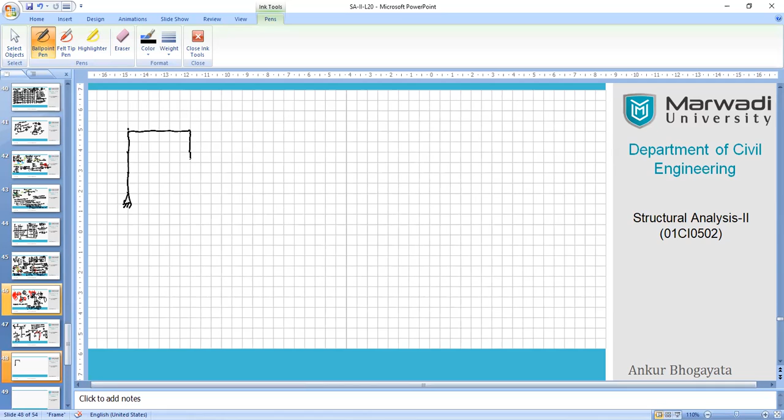Let me give you the question first. So we have a frame like this: 1, 2, and 3, that is the height. We have a hinge support here, right? And we have 3 meters height of this column. I'm trying to develop structural symmetry also. So this is 1 meter. At a distance of 1 meter we have a point load, and we have a UDL on this member having an intensity of, let us say, 1 kilonewton per meter, and we have a point load of 6 kilonewton here.

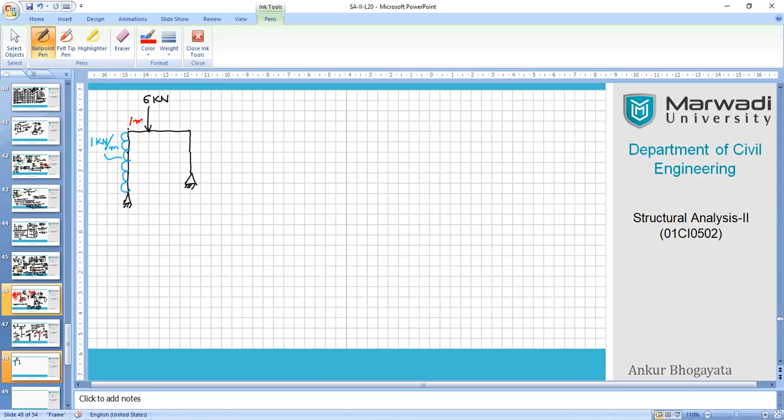Then we have 1 meter distance and 2 meters distance. The total height is 2 meters again. If I wished, I could have changed this data, like 6 to 5 or 10. But I want to give you this data because later you can compare and confirm your understanding with the solution from your book. Don't open the books right now, otherwise you will lose the charm of doing this. So let's do it without referring to the books.

A, B, this is point B. Let's say C and D. There is one more informal point that we can locate here, E. So friends, we want to draw the SFD and BMD for the structure using Castigliano's second energy principle. You know the steps; if you want to rebrush, here they are. First, draw the free body diagram. Second, identify the redundant forces by calculating the external SI. Once you locate the redundant quantity, considering that, find the reactions. Here you can see that earlier we selected the horizontal reaction as the redundant, R.

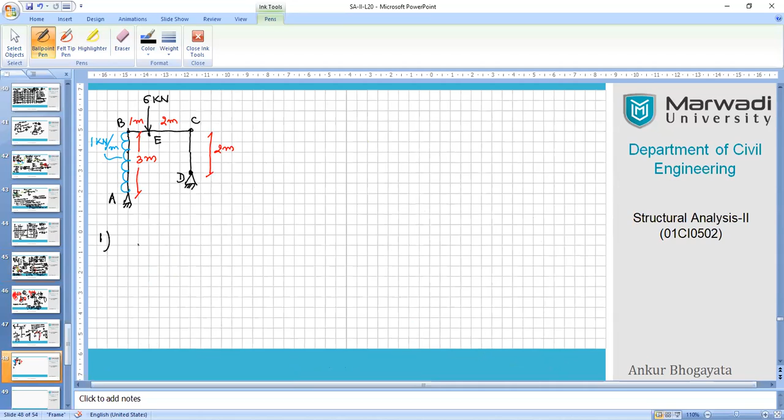So friends, in this case, let me discuss the solution first, right? Drawing a free body diagram is not a challenge. So first of all, let us draw it. Along with me, everyone will draw it in their notes, right? Without any doubt, everyone has to do this. Assume that this is a straight line. You have to remove the nature of the support and we will draw the

reactions over here. Vertical, that is here. And we will assume that the horizontal reaction is also positive because we are not sure, but we can at least name it. Let's name it as H. This is at A. So we will give a value to this horizontal component, that's H, right? So HA is actually H. Then here we have another member with us.

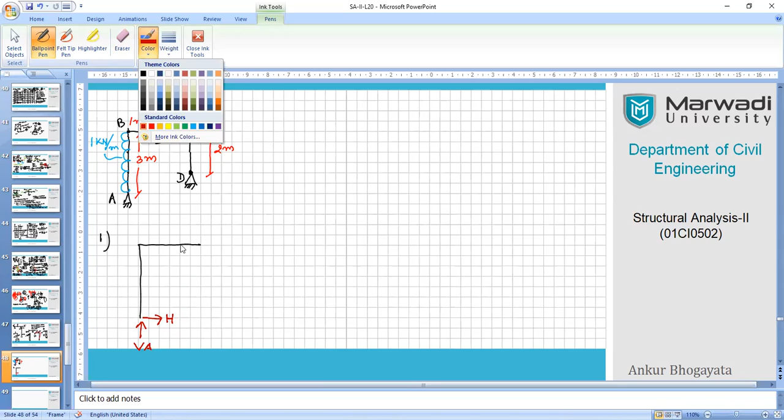Please pay attention and focus on how we solve the problem completely so that you don't miss out any of the things. Let me draw it straight. Let me try it. Otherwise, we'll carry on. Okay, all right. Manageable, right? So here you have the vertical reaction VD. And again, let us assume that we have reaction HD.

We are sure about this value that we have assumed as HA equals H, because we need to take the partial derivative of all the components with respect to H, because we are going to select H as our redundant additional condition. So first of all, let me give you the basic concept. Let me draw this point load and UDL on the system, right?

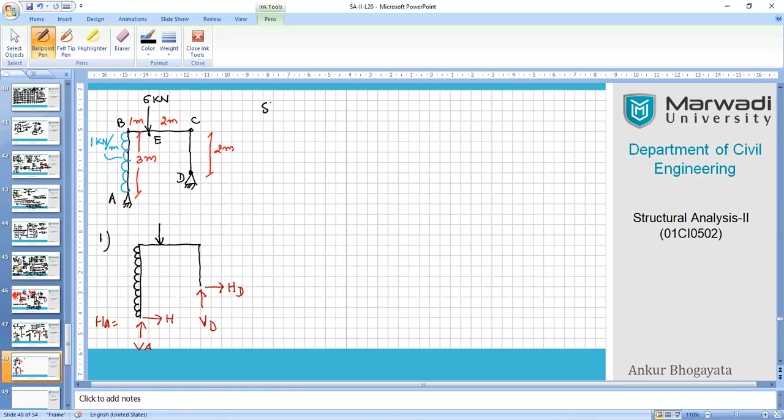So we have drawn the free body diagram, and now you can calculate the SI of the system, right? So how many total reactions are there? There are 4, and the conditions of equilibrium available are 3. So you have 1. So this is the statical indeterminacy of this structure. And if you remove any one reaction or one quantity, your structure will become determinate.

For example, if I remove this H, your structure will have total 3 reactions: one horizontal, one vertical, and again vertical. Then it will be possible for me to develop all my equations, but that is not the real structure. In the real structure, you still have one additional quantity that we call redundant. This redundant we have selected as H, and based on that, we will be taking the partial derivative of all the generalized equations for further calculations.

Okay. So now let's put the basic equations of equilibrium. That is step number 2. Use ΣV = 0. What would it be? VA plus VD equals 6. That is a very simple equation, because this is the 6 kilonewton, and here we have 1 kilonewton of force. Now another condition which is very important for us is ΣH, that means the algebraic sum of all the forces in the horizontal direction is 0.

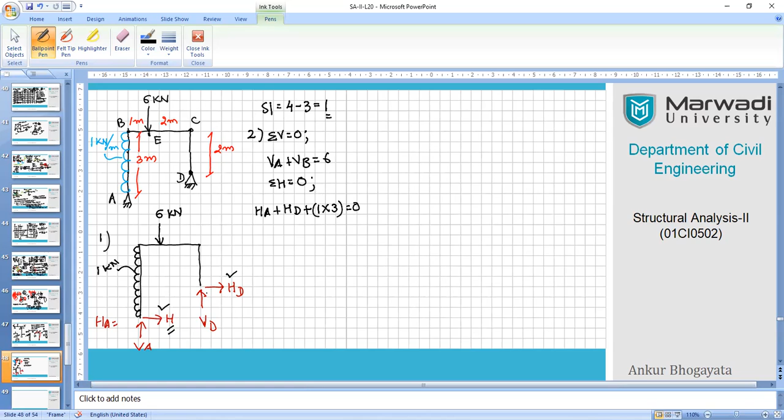We have assumed the directions of the reactions as per our old understanding, that unless you are confirmed, assume everything as positive, right? So HA we will replace with H. We don't know what HD is, so we'll keep HD as it is, and plus 3 equals 0.

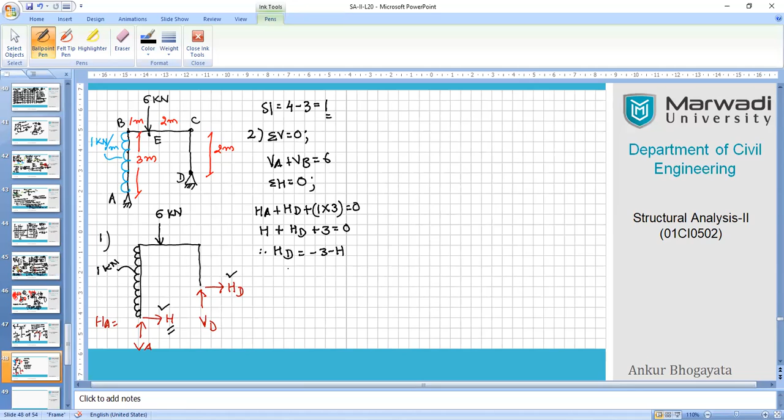So friends, now we have two values in hand. HD is nothing but -3 - H, right? And we have HA already with us. We have assumed it as H, right? So with this, all the reactions we need to work out. So for that, now you need to work out the VA and VD. So carry out the moment of all the forces about any of the supports, either A or D.

So let's take moment of forces about point A. Now it's your turn. So please work upon this and come back to me when you are ready with your answer. I want to have answer of VD, right, from your side first. So just give me an answer of VD, otherwise I will guide you how to do it, but it's very simple. Start taking moment of all the forces about point A.

All the forces. So how many forces? Let me confirm with you. One is VD, second is HD, third is 6 kilonewton, and fourth is 1 kilonewton. So you have to have at least 4 terms in your equation. So now you know clockwise, anti-clockwise. So please be sure about that, and let's work out VD. First you work out and then I will demonstrate. So I'm giving you 2 minutes for this. And I'm sure that those who have joined have entered that detail in the chat box.

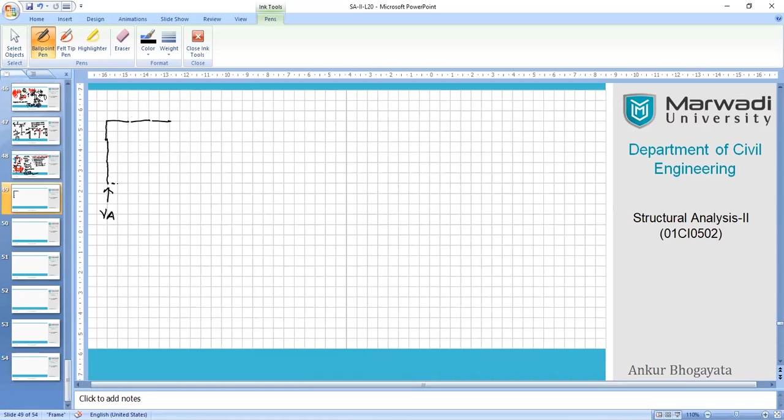Assume that this is a continuous member, please. Okay. So now here I'm writing VA. And what was the answer for HA? H is positive, so let's write H here. So here again, we will take 1 meter and 2 meter. Now see, there is an interesting discussion we need to make here: HD is again negative, right? So we can continue with this as it is. Otherwise, you can make it negative, take it out of the bracket, and write it like this. It's up to your convenience. So we'll continue with this as it is.

So again, let me write here. It will not impact your final answer, right? So here it is minus 3 minus H. Let's write down minus 3 minus H largely. And here we have one force, that is 6. And here we have other forces like the UDL. So why not write the VA value here itself? VA is 3.5 plus H by 3. And here it is 2.5 minus H by 3.

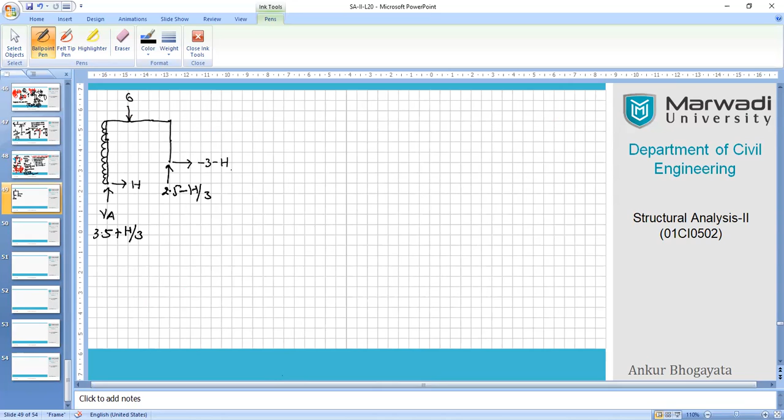You should avoid playing with the numerical signs largely, so that you can get your answer in a desirable way. So this height is 3 meter. It is important for us to write down all the segmental heights, because now we are going to write the generalized equation for all the segments. So it is necessary to give names to them. A to B, B to C, C to D again, and this is E. So these are the main points, and now you are all set.

Now here I would like to make a discussion, and then after you are free at your end to carry out the calculations. See, in this case, we can see that the frame has 2 columns, and there is a common point which is meeting it at point E. So it is very much obvious that we will not be continuing from any one end and complete it on the other end. So we will not follow the pattern like we start from, let us say, D to C, C to E, E to B, and come to B to A, right?

But what we will be doing is we'll be dividing this frame in 2 components largely on either sides. Like first we can start from A to B and B to E, and then we will end here. And then again we'll start from D to C and C to E. Because after all, we know from the first principle that whenever you cut a member at any section, it should be in equilibrium on either side of the section, right? So it should not be a problem for us to understand this concept.

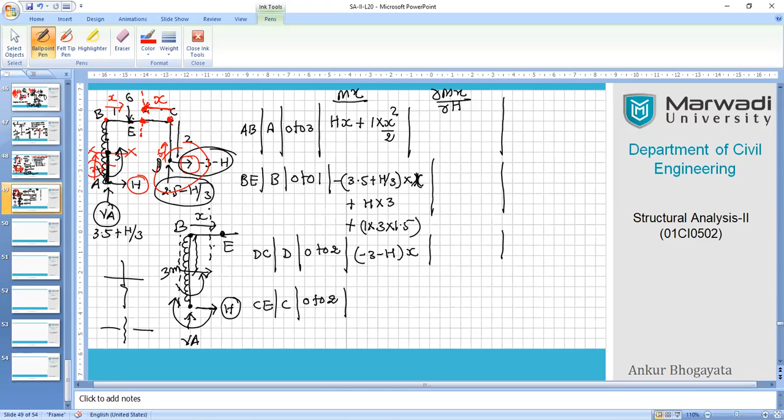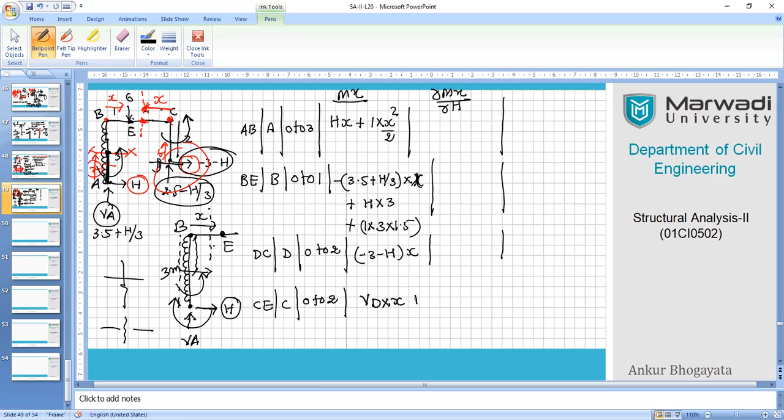So we'll be using VD into X. VD will be creating an anti-clockwise positive moment, so I'll write down VD into X. That's all. And here with the full length, full height, -3 minus H into 2, right? That will again create an anti-clockwise moment for this member, so I will take it as a positive moment, -3 minus H into 2 meters, because now you have to use the full length. I think that's all, and then you can go for the partial derivative.

So friends, I have given you all the important equations over here. Here you can replace VD again, which is 2.5 minus H by 3. Let me write it down here itself so that you can simplify your equation effectively. So it is 2.5 minus H by 3, into X. Now I think you are done with all the required values.

So let's come back to del Mx upon del H. Here it is X because we have only one term which contains H. Here you need to simplify and expand this term, like 3.5 into X plus H by 3 into X, right? So basically it is minus X by 3 first of all. Then you have plus 3, because we have H at two places. I hope you got the point how this has come negative, because we expand this term and it creates a negative.

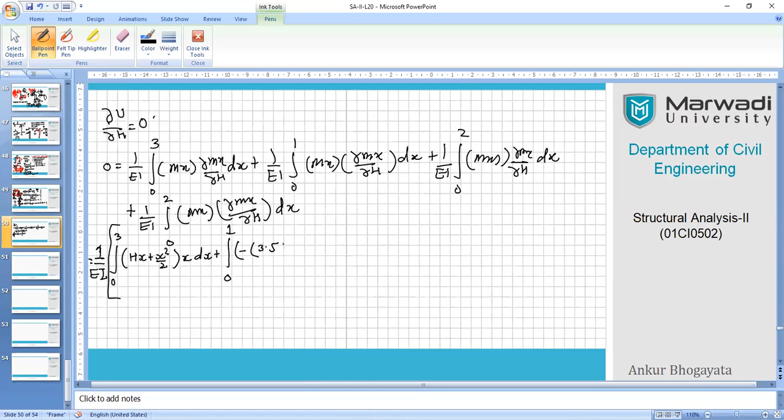Okay, so that we can avoid unnecessary writings over here. 0 to 3, then 0 to 1 meter. Let's say, what is the equation? It's going to be a little bit of a lengthy equation. Minus 3.5 plus h by 3 into x, first of all. So minus 3.5, plus or minus 3.5 plus h by 3. So plus h by 3 into x,

then plus 3h, so plus 3h, and finally we have 4.5. We can multiply this on the spot and we can write it plus 4.5 into, don't forget that now you have to multiply it with del mx upon del h, and that is x by 3 plus 3. x by 3 is negative. So we'll keep them as it is, x by 3 plus 3. Now your multiplication has been completed.

So this is dx. So this is the crucial part of this numerical. When you are expanding everything, be careful. First you expand internal terms and then you multiply with the external terms. Okay. So plus 0 to 2 meters, friends. What is the equation? Minus 3 minus hx. So this is minus 3 minus h into x, and that is again to be multiplied with del mx upon,

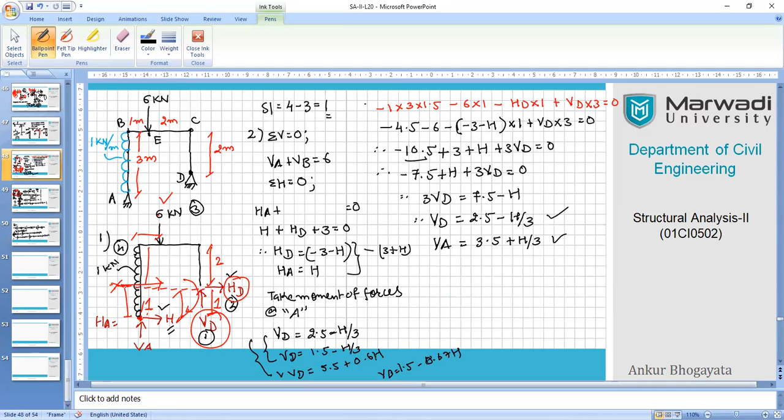As far as this energy principle is concerned, there is no difficulty, I think, apart from drawing the free body diagram and the SFD and BMD. Excluding that part, I think you are out and out clear about how to handle these complex types of loading. You can realize how complex it is, but now you are able to solve it, right? The only small care is that when you are working on the initial steps, you should be very clear about the reactions you have calculated. Otherwise, this is completely fine.

I'm more than sure that you have understood how the equations have been made and how we have kept the h in each and every equation, so that later on we can take their partial derivative. Now the ball is in your court, so you have to find out the h value out of this, and I'm giving you the answer also for practice. Just try it, try to understand, try to identify, right? And we'll be discussing the consistent deformation method in tomorrow's class, on your demand.